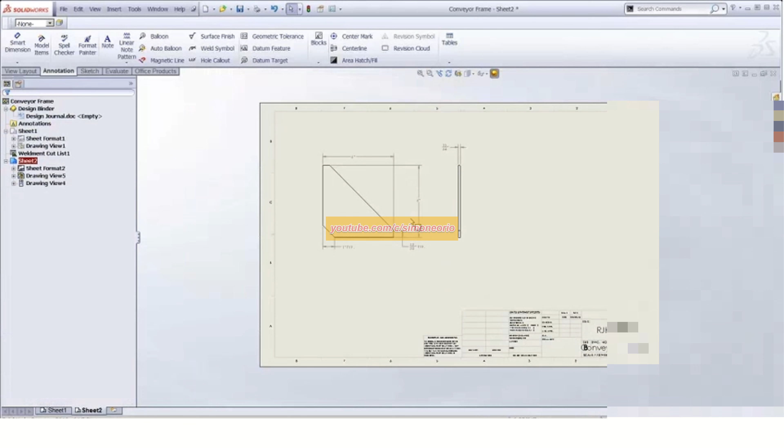Another question: how can I insert a part file into a weldment? Well, that's pretty easy too, just like you would do any other part. It's not any different in a weldment. So let's do an example of that.

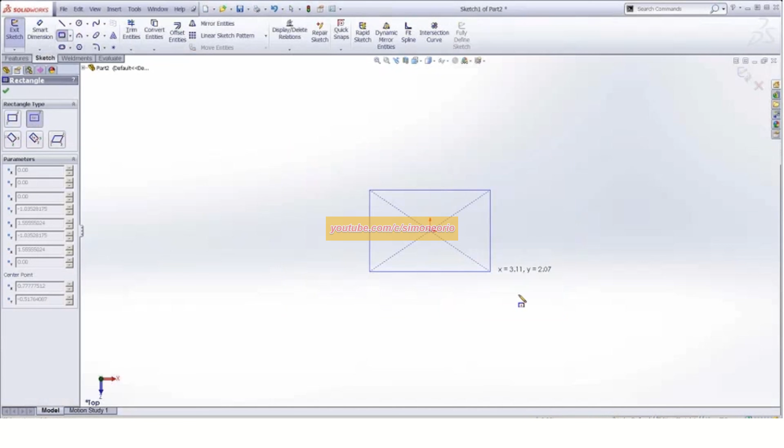Let me do a part file here. Let's do a 2... I'll make it a little bit different than that. Let's do 3 inches by 2.5. And I'm going to extrude this.

Now what's interesting, what does this kind of remind you of? This reminds you of a profile for a weldment. So technically speaking, if you have a common foot size that you use, you could turn this into a weldment and put that in your library to use with all the particular properties and things like that.

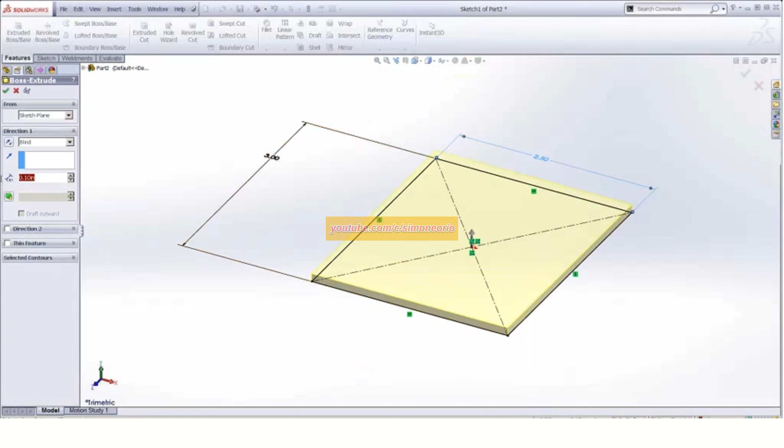Now if you already have this done, let's make this a 1/2 inch, pretty heavy duty. I'm going to save this and put this... there we go, that's fine, as heavy foot. I'll go ahead and save this.

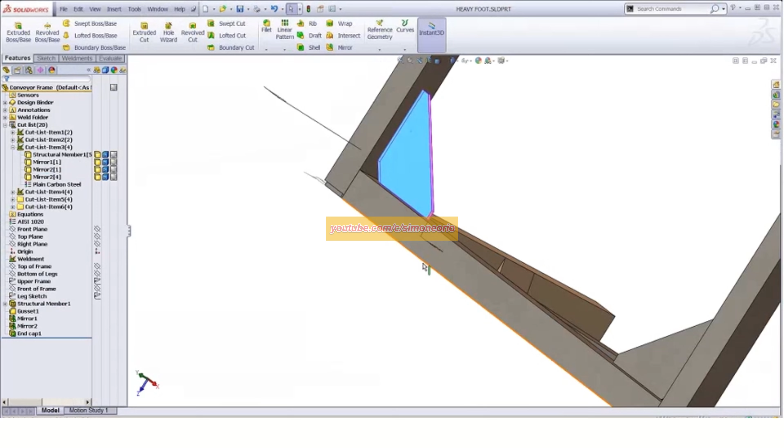Now let me go back to my weldment here. Get rid of that. Let me find my original right here. Because what I want to do here is, again, if I put this foot in, I want to mirror this as well. So I could pull this all the way back here.

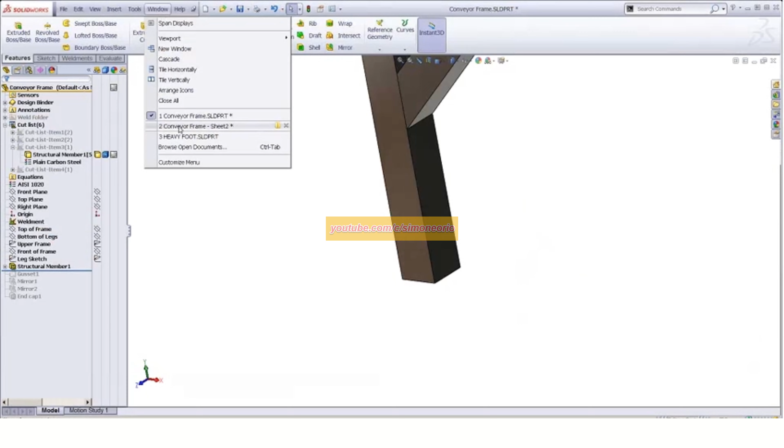And now, insert pull down, part. And what I'm going to do here is go ahead and find... where did I put that? Hang on a second here. Night school, yep. Why am I not seeing? Hang on, I must have went to the wrong insert part.

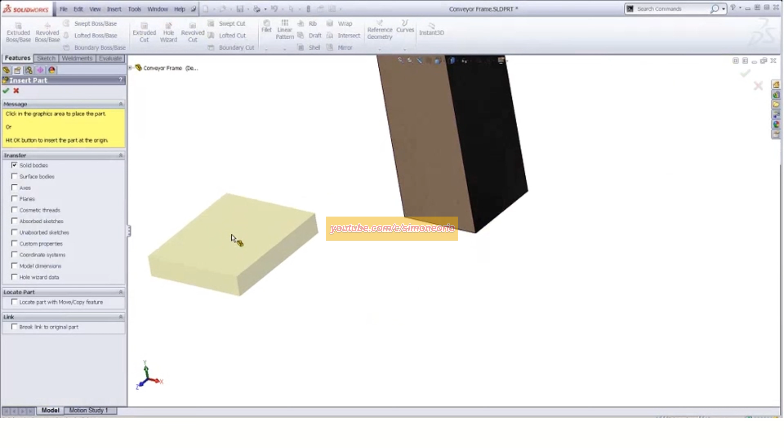Oh, here, there we go, heavy foot. So what I want to bring over, because I centered that, I probably want to bring some planes and the solid. That'll allow me, if I need to, to push this into place. But I'm just bringing a part into a part here, so I'll just drop this for the moment.

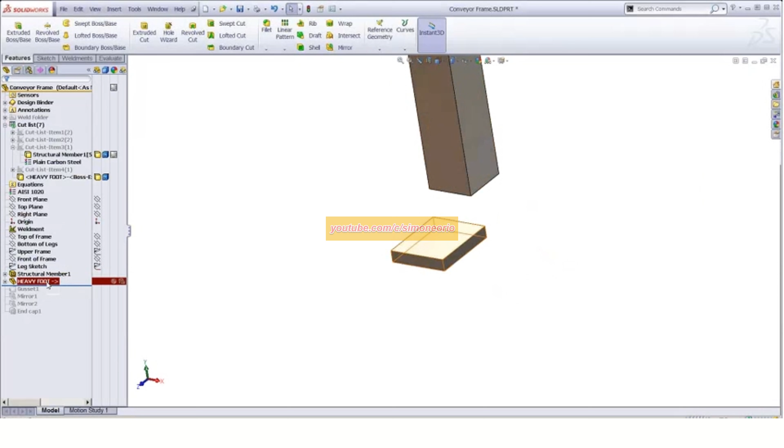Okay, now what did I do? I forgot, when I inserted this foot, I need to turn on the move copy body command, basically. Let me do that again. Insert part, heavy foot. This time here, I'm going to locate this part with the move copy feature.

Now, notice there's also a break link to original part, so we could literally just have copies going into this. All right, so now, here we go.

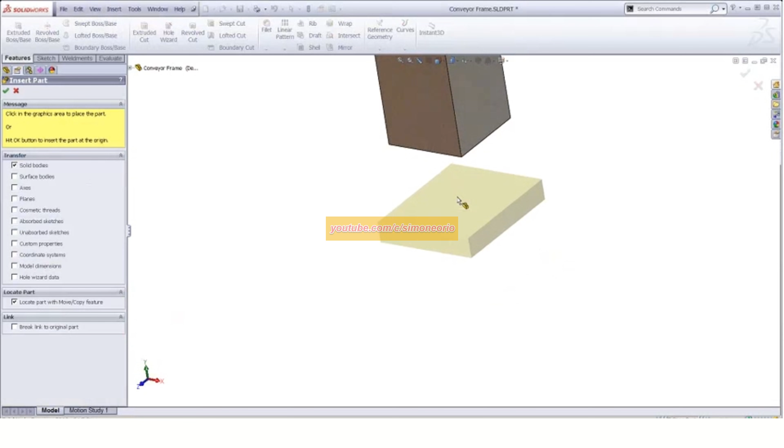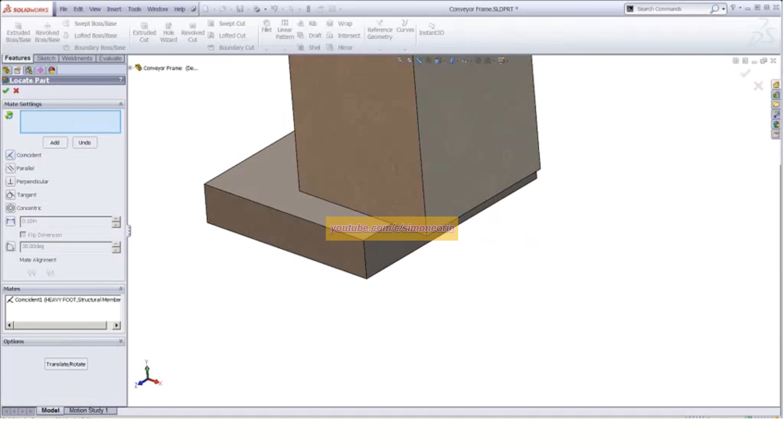So now let's do a coincident here of this face and this. I'll do here to here, a distance of 1/2 inch. And then here to here, distance of 1/4, and flip that, and add, and okay.

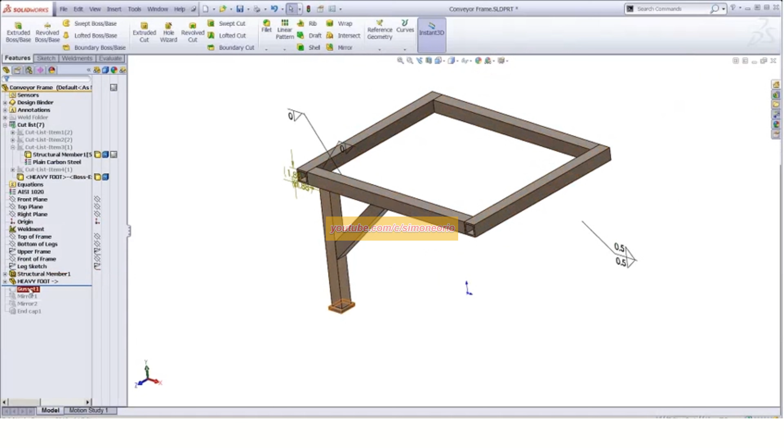All right, so again, putting a part in a part file there. So now, once again, I just add it to my mirrors. All right, so I'll come down here. Now, when you inserted that foot in there...

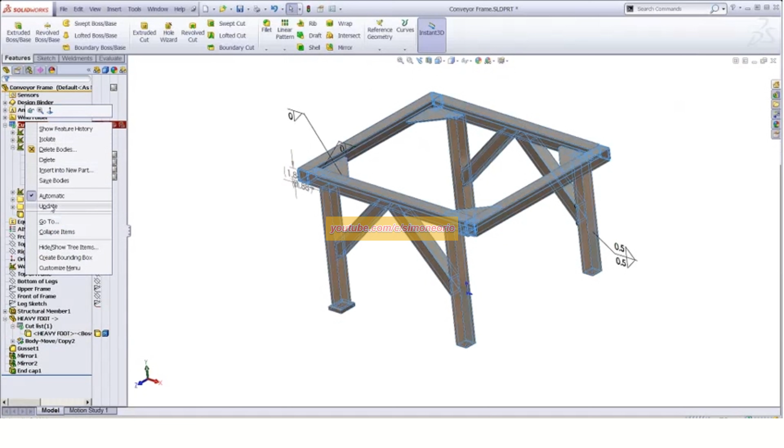Okay, we see our cut list here. Again, if we had properties there, let me go ahead and update. And there's our foot. If I go to the properties here, once again, in this case we did an insert part into part, we would need to put these properties in there. But that's if I already have something already done.

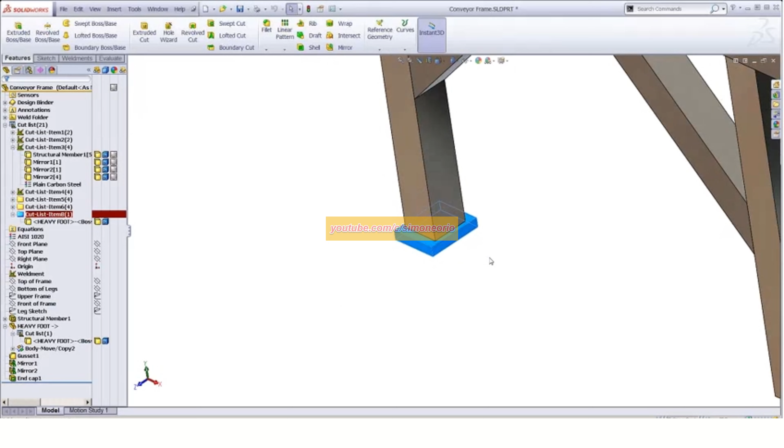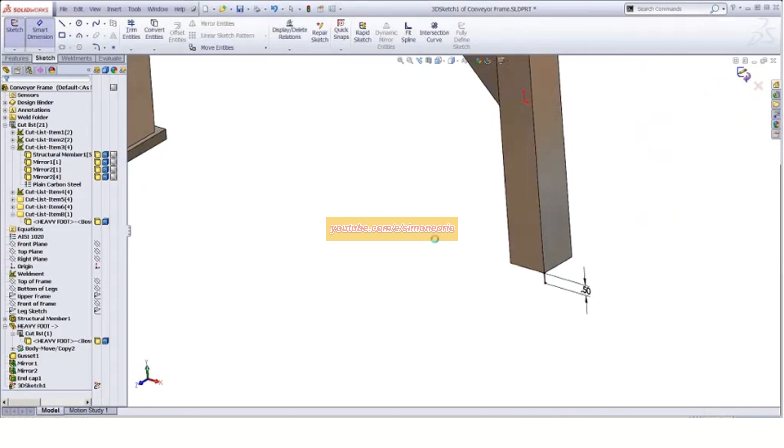What would be really handy is I take one of those weldments. Say, for instance, here I did a 3D sketch, 0.5. And with that sketch, I could come in and find, and I'll do lumber just because it's solid. This could be metal foot or however you describe it. I could come in here, structural member here.

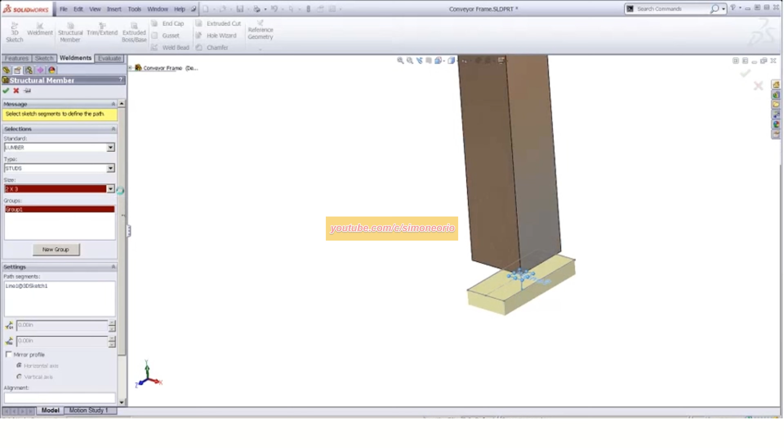Based on that, I'll just go to the smallest size that I got, actually 2 by 3. I could locate that profile. Oop, I keep spinning the wrong one. There we go. Locate it, put it over here in this corner. Again, not quite big enough, so no, none of them are. Okay, in this case, but again, there, locating that into place.

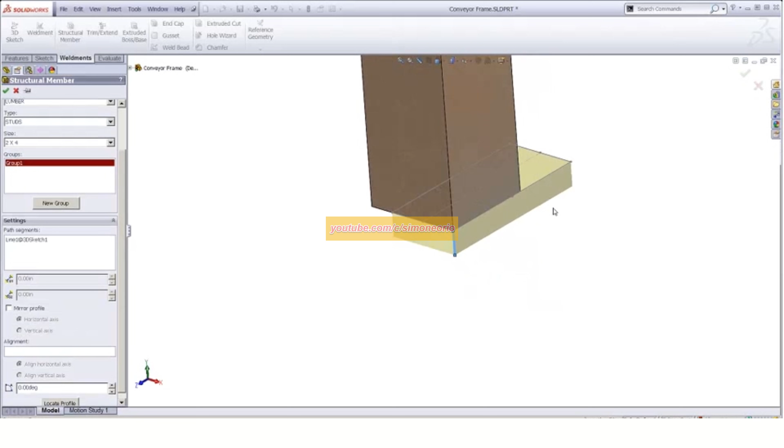And the advantage of having something like this, instead of that insert part file, is again, this is plating, things like this. That could be a custom welded blob that you're sticking in here that you want to put in this weldment to be included in this bill of material. So this works great for, like, flat sheet stock, things like that.